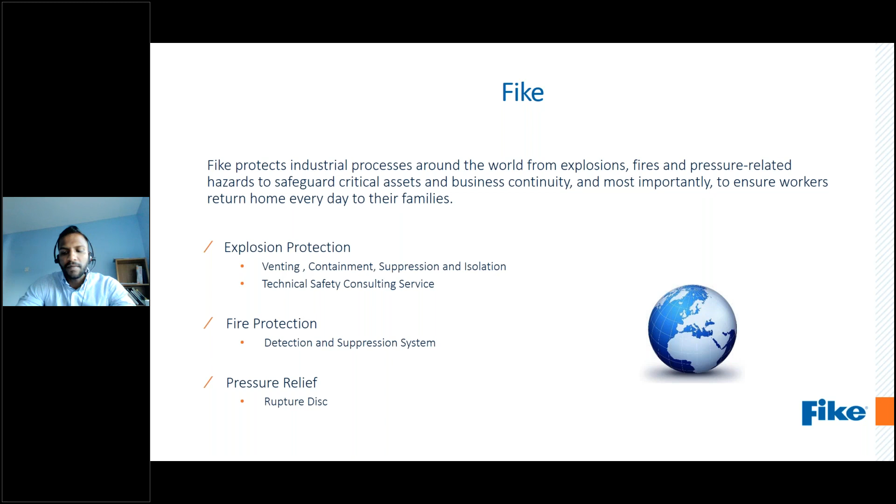The reason behind that is lack of engineering or lack of awareness. We could point out to several reasons, but it is very sad and pivotal for engineers and consultants like us to understand from each near miss and primary explosion, so that we understand the causes and work on them through preventive measures and also protective measures, so that such deviations leading to explosion could and may not occur in the future.

If you're all interested to know more on explosion and incident investigation of these accidents, please drop me a message or email post-webinar, so that we could send you a couple of incident investigations performed by Dust Safety Science.

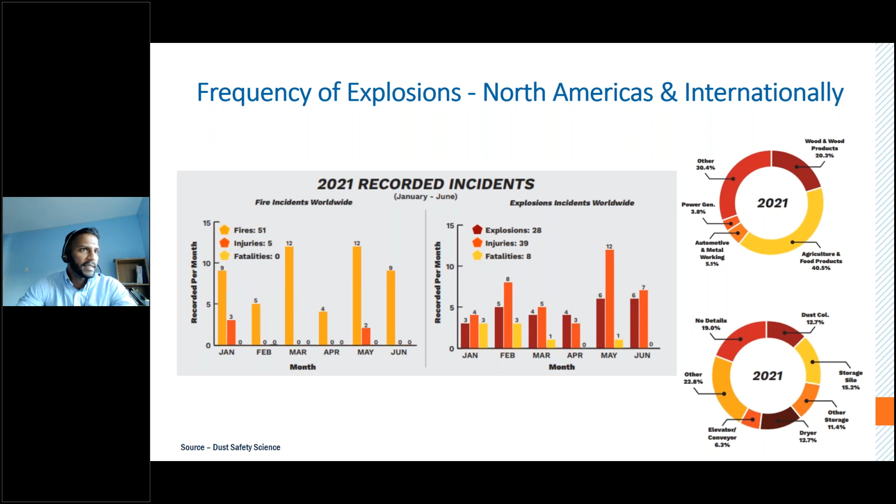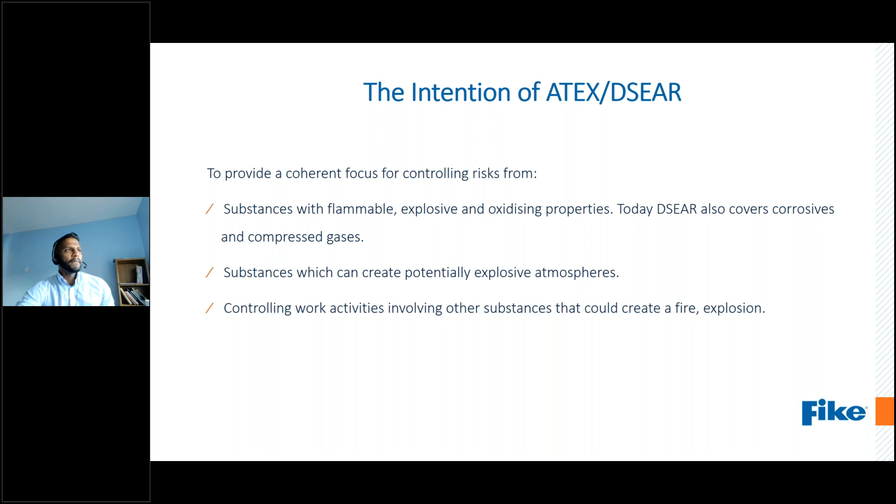If you ask me, is there a minimum requirement for material stored or used in a facility to get compliant with ATEX? I would say no, because ATEX is not pointing out a certain amount of material. The reason is, say if I'm running a plant manufacturing an explosive like TNT, 1 milligram to 5 milligram of TNT can take out an entire roof. So ATEX is not specifying and customizing its regulations focused on products or facility, but it's a horizontal regulation. So we have to understand where we stand and how we customize a solution accordingly.

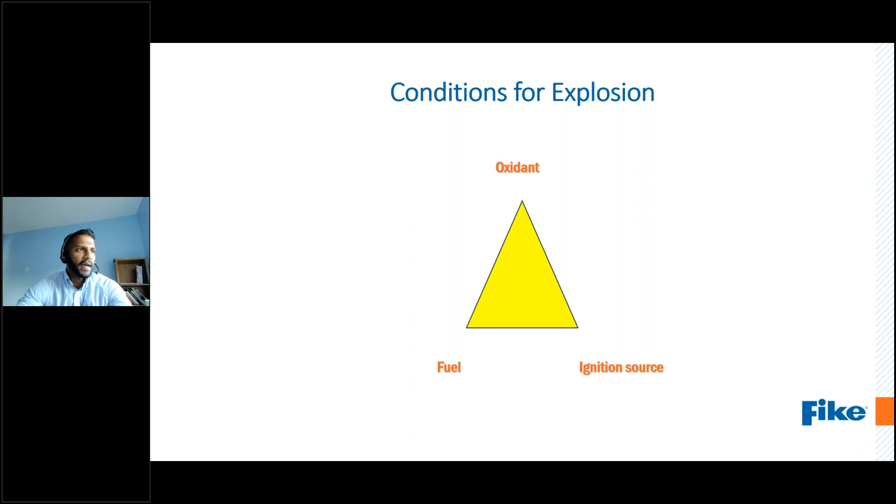Conditions for explosion - what you're looking at on the screen is actually not a condition for explosion, it is a condition for fire: oxygen, fuel, and ignition. The difference between fire and explosion is obviously mixing within a confinement.

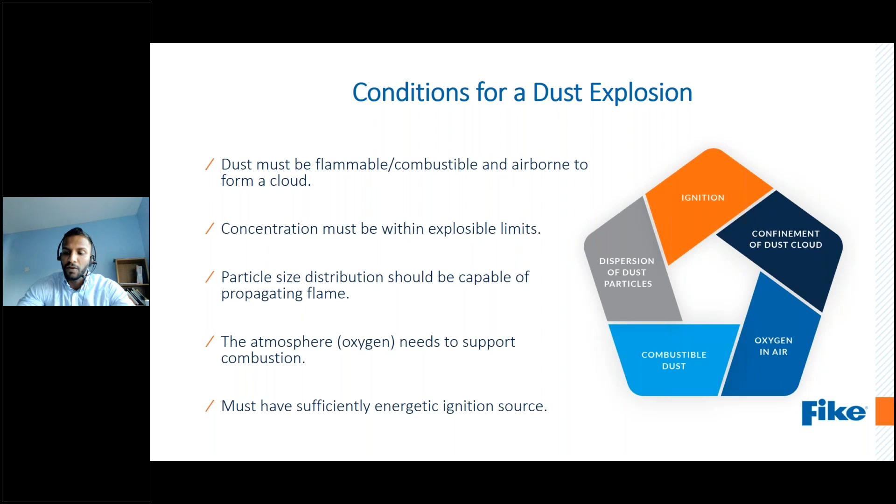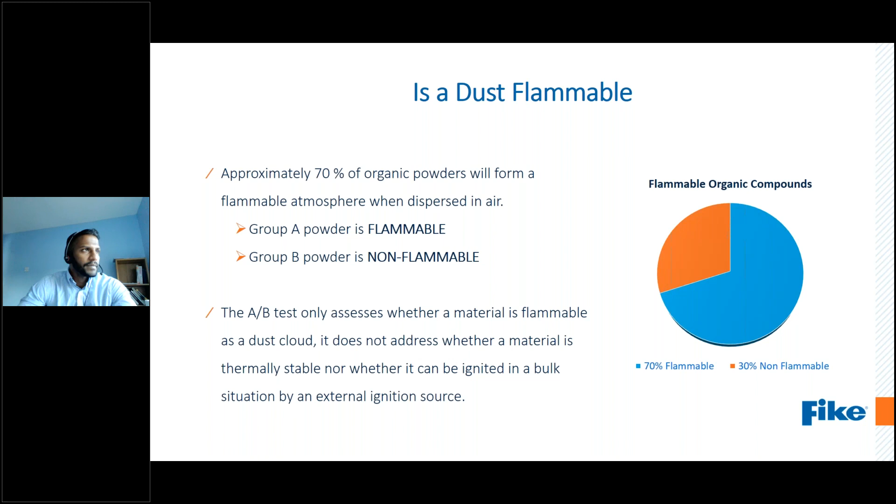Speaking of flammability data - flammability data is nothing but information we would find in a safety data sheet, same as for gases and vapors: auto ignition temperature, ignition sensitivity, LFL and UFL, as I mentioned in the previous slide. For dust, there is something called minimum ignition energy.

That is the first piece of information we would like to understand: minimum ignition temperature, layer ignition temperature, Pmax, KST, ST class. I'm sure we have a mixed audience here - some are familiar with these terminologies, some may not - so I would like to address a couple of the top four data points.

MIE is minimum ignition energy, the energy required to ignite a dust cloud. But what is the source of this energy? It could be from different sources: an electrical circuit break, static, friction, or a foreign body causing a mechanical spark.

Minimum ignition temperature is the hot surface temperature that ignites a dust cloud. Layer ignition temperature is the same hot surface igniting a layer of dust suspended on top of them.

They do have differences and an equation relating them. MIT and LIT have an equation and relation. As the layer thickness increases, the temperature required to ignite the layer goes down due to an insulation effect. Pmax and KST are very important parameters.

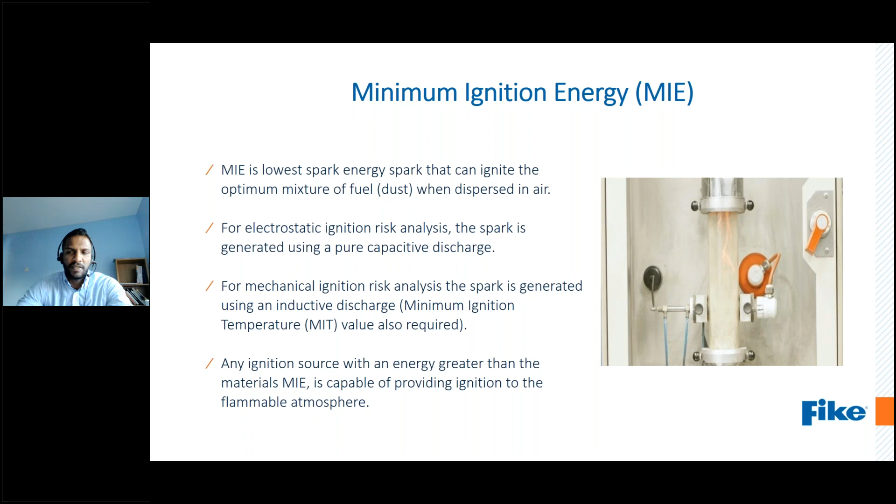Another parameter is MIT, the lower surface temperature that can ignite an optimum mixture of fuel. MIT is the auto ignition temperature for dust. It's used for establishing the maximum permitted surface temperature of both electrical and non-electrical equipment. Even mechanical equipment can become hot and give rise to high temperature.

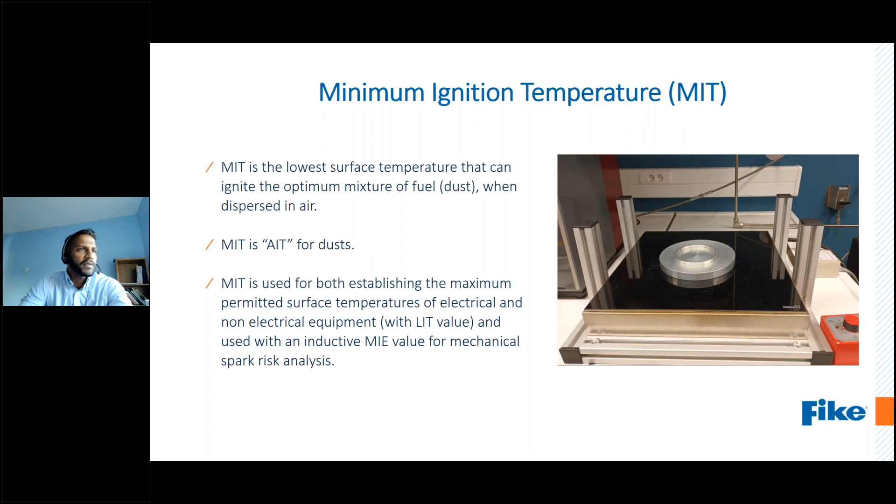So that is Pmax, and we use this information to design our safety protection equipment. KST, the dust constant, is the change of pressure over time. This is an important parameter because if Pmax is like speed, your KST is acceleration - the rate at which pressure increases over time. That's a destructive force, I would say. Explosion severity data is used to design your venting, suppression system, and containment. These parameters are used to design and define your basis of safety.

This is quite a common question, and we've been asked whenever we visit a site from our clients: how do we understand which is a dust cloud? Is there any right method to establish that this is a dust cloud or this isn't?

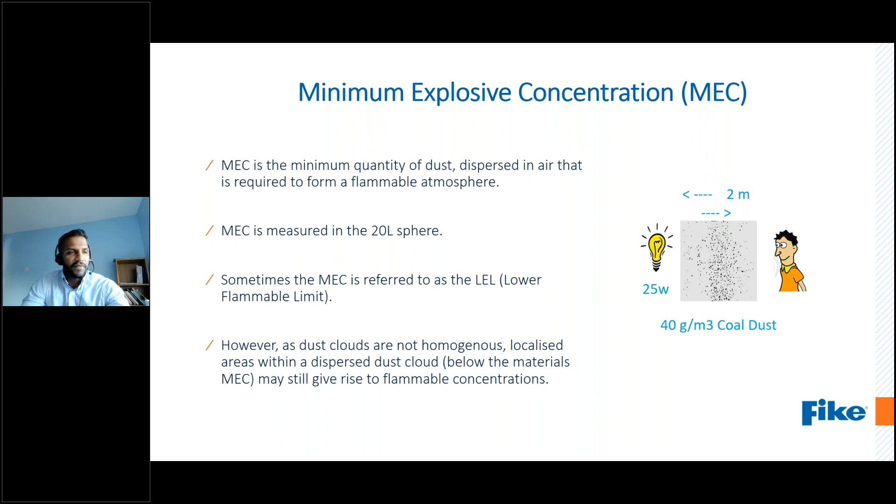That's why you get a primary explosion - maybe not a primary explosion, could be an ember or flash fire that could generate and disturb other suspended dust, then creating a primary explosion, consequently leading to a secondary explosion. So MEC is quite important if the facility is closed or a clean room, or if it is inside a hopper or a silo.

Limiting Oxygen Concentration, LOC, is the maximum concentration of oxygen in a mixture of dispersed combustible dust, air and inert gas at which an explosion will not occur. We all know oxygen plays a vital role, so there are instrumentations we set up to observe what amount of oxygen is required to form a dust cloud, and we constantly monitor that oxygen so that when the oxygen level goes up, we use inerting gases to kill the flammable atmosphere.

There are thumb rules - if you do not know the LOC value, we could take 5% volume. However, it is best that testing has to be carried out.

Before moving to basis of safety, I would like to stop here. Should you all have interest to understand more on this explosibility and ignition sensitivity and severity data - that is Pmax, KST, LIT, MIT - please drop a note to us. We would like to have your feedback so that we could put forward a new webinar on these data and how relevant they are to your process facilities, because not all data are required for your facility. Sometimes you might be misguided by Google basics research that if you have a fluid bed dryer, you might need ABC information - not necessarily.

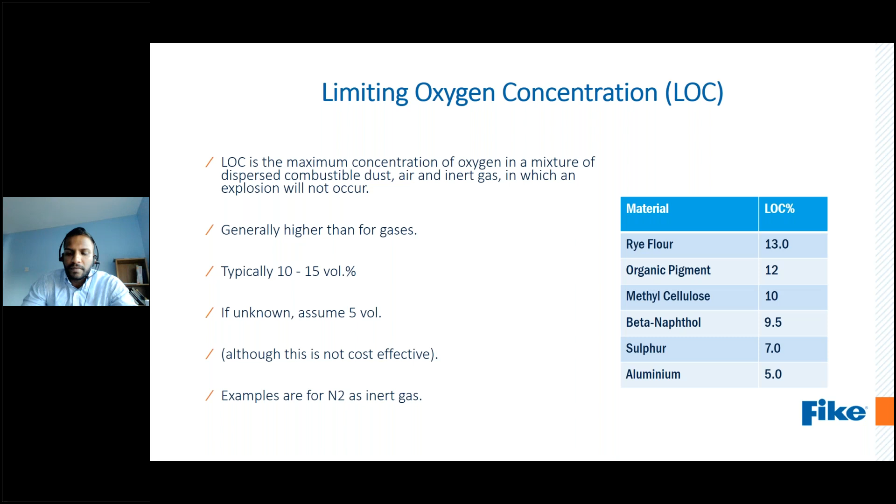The figures we discussed here, Pmax and KST - for a situation, let's say you're part of a biosolids waste generation facility. You collect all the biosolids from the facility and dump into a warehouse, which you'd expect to have 90% dry solids and 10% moisture. That's not the case - during loading and unloading in summer, because of insulation effect and heat on the warehouse roof, the material, that is the dust on the top layer, could become 100% dry.

That is Pmax - if the pressure is measured for a 90% dried solid, let's say for example it is 5 bar, if it becomes 100% dry, it could go up to 10 bar. Likewise KST, which is a destructive force - if measured for a 90% dried solid, the KST value is 20 bar meter per second, for 98 to 100% dry solids it can go up to 150 bar meter per second. That is very important to understand.

How do I test and what conditions should I test under? Likewise, second scenario - your material might be having a size, say, more than 500 microns particle size. Hence it cannot be flammable, it cannot form a dust cloud. But this may not be the same - this could be different in your dust collector dirty side.

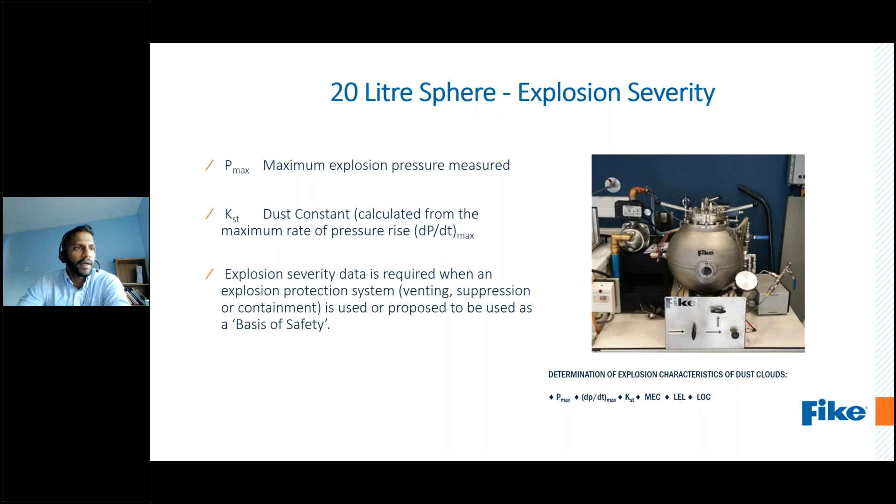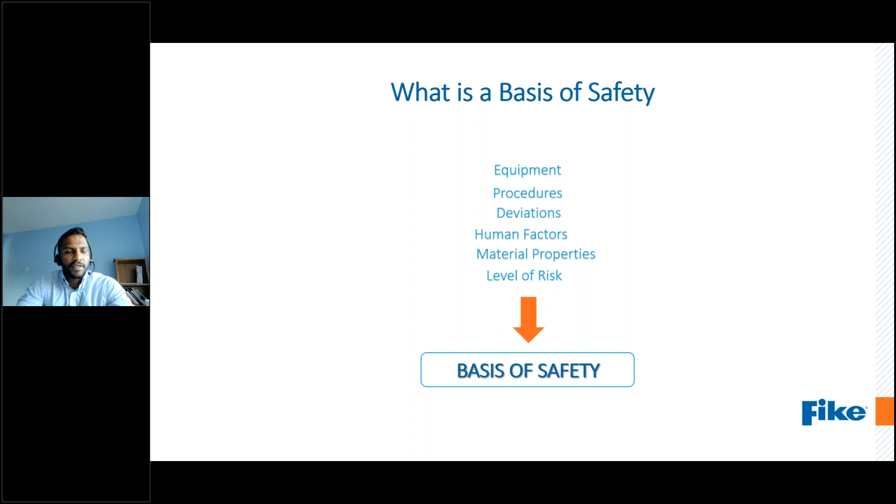Basis of safety is nothing but layer of protection, as I listed out: equipment, procedure, deviation, human factors, material properties, and level of risk. Basis of safety is nothing but combination of 1, 2, and 3.

To bring us to ensure safety is installed or implemented or achieved by a combination of three things: explosion prevention techniques, avoidance of ignition source techniques, and explosion protection techniques. Whatever we are going through now has nothing to do with ATEX regulations specifically. Of course ATEX also speaks to this, but we are understanding dust explosion first, and then we'll apply the same into ATEX regulation. Irrespective of ATEX regulations, if we have attendees from Middle East, India, other parts of Asia, or South America, I'd like to stress this: for dust explosion have basis of safety, that is 3 preventive measures, ignition control, and explosion protection.

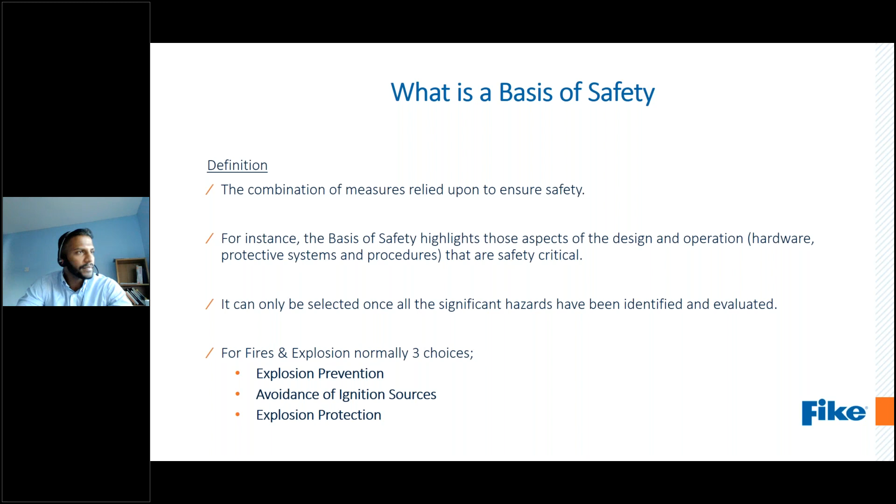There are different situations. Even if you work with a basic engineering company, you might be using acetylene for welding. Replacing acetylene with argon is also called an explosion preventive measure, because you're replacing your material. But people working in an industry like food industry cannot replace sugar. So what we do is try to keep our oxygen level controlled, or we would not blow the material around - we might do a pneumatic convey. There are several engineering measures and methods that could be applied to avoid formation of a dust cloud.

Obviously we could work for gases and vapor. We can work below flammability level, and also we can work above flammability level.

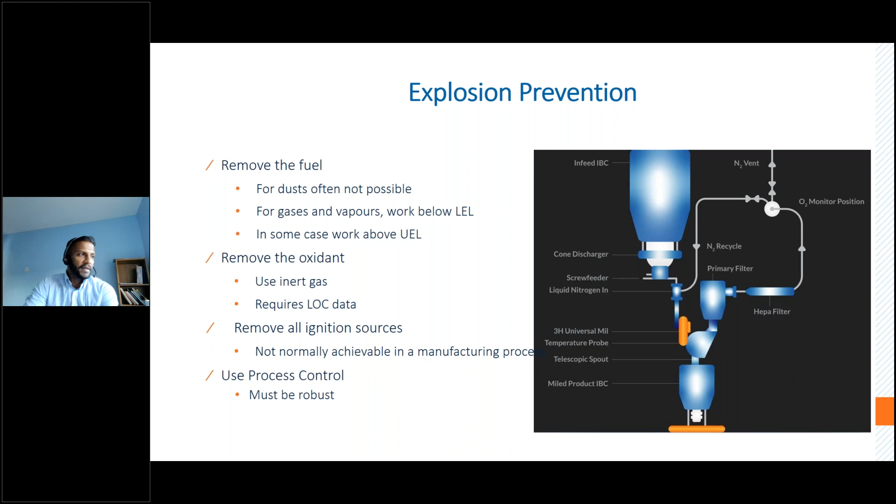The second basis of safety is nothing but avoidance of ignition sources. Avoidance of ignition sources means ensuring that equipment is in place and maintained accordingly - that is for mechanical sparks. But how do I avoid other ignition sources? Those could be from electrical, from static, and from thermal radiation.

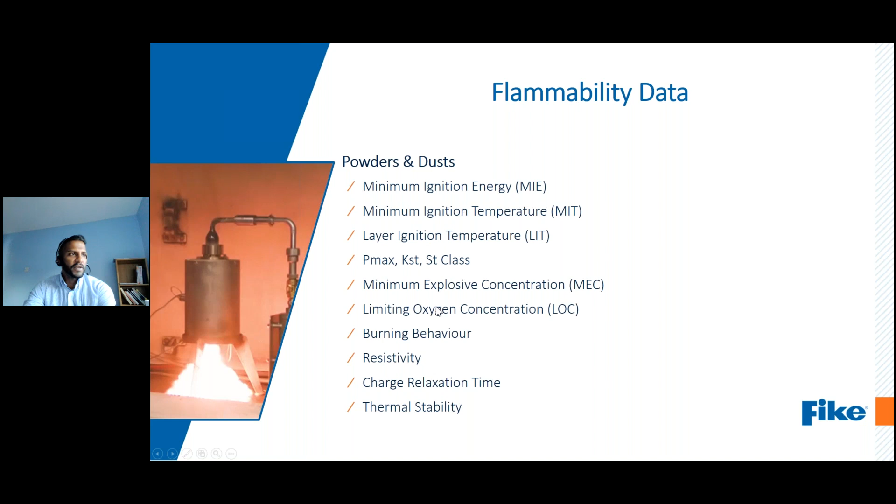That's why we need to come across data. We need to know data about the powder or material within our facility, so that we could put forward engineering measures to avoid ignition sources. For example, if I have to avoid an ignition from static - that is spark discharge - how do I know? Because each material requires a certain amount of spark discharge to get ignited. We get it tested, and then we put those measures in place.

What measures in place? We ensure earthing is in place, and there is continuity through coupling or jumpers in our pipelines. But how many industries are ensuring this by resistivity testing? That's the number one question, because whenever we go on site there could be a near miss, and a client might say, well we had a near miss and we have earthing in place.

But the first question I'll throw at them is: what is the resistivity? When was the last time you performed resistance testing? No answer, right? The resistance testing will ensure that if the material requires a certain resistance - say 15 or 12 or 10 ohms - to avoid generating an ignition source, then we have to ensure that for our material, for our product, the resistance achieved matches the measurements required.

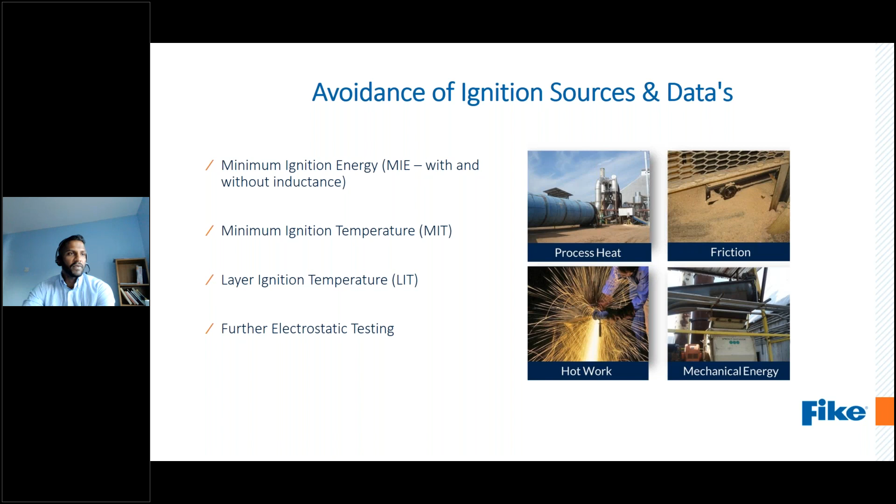The third basis of safety is containment, venting, and suppression - that is explosion protection. If your first basis of safety, preventive measures, has failed, all man-made engineering solutions can fail because they come with failure data according to reliability. Even if you install ATEX approved electrical equipment, or have a good MOC or maintenance program for mechanical sparks, they could fail because it's all man-made. So we need the third basis of safety, the final wall: containment, venting, and suppression.

Can we build a strong containment vessel? What is a containment vessel? It's a vessel built strong according to the data, that is Pmax, the maximum pressure measured. We would design a vessel or hopper or silo that could withstand an explosion pressure if the hopper is expected to be installed inside.

Venting means we design a vent according to Pmax, so that if the vent opens, we achieve Pred, the reduced pressure, to keep the dust collector or hopper or process line safe. We also need to know Pstat, the pressure at which the vent should open. If you're holding a silo or hopper dust collector of starch or sugar, Pmax of that organic material could be 8 to 10 bar depending on fineness. I would size my vent for 2 or 3 bar depending on process parameters, because sometimes process delay and process upset could cause an increase in pressure, so the vent should not open at that time.

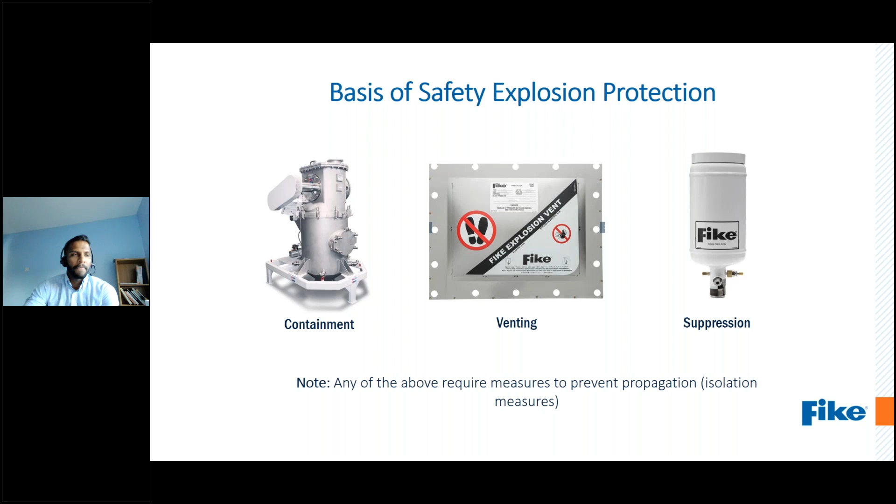Right, now we are moving on to ATEX regulations. There are two regulations. ATEX has been regulated and provided to the European Union. One is for plant and second is for equipment.

Plant safety regulations are directed toward facility owners and employers, to ensure workers' exposure to fire and explosion hazards are minimized, and generally address operations, facility, and building construction. Equipment regulation is towards facility owners and manufacturers of equipment that is intended to be installed in an explosive or flammable atmosphere.

Each independent city, country, or state has its own legal regulations created and adopted by their authority bodies. Likewise, France, UK, and Germany have observed ATEX regulations and made their own regulations as well. But all the European states and member states have to oblige ATEX regulations.

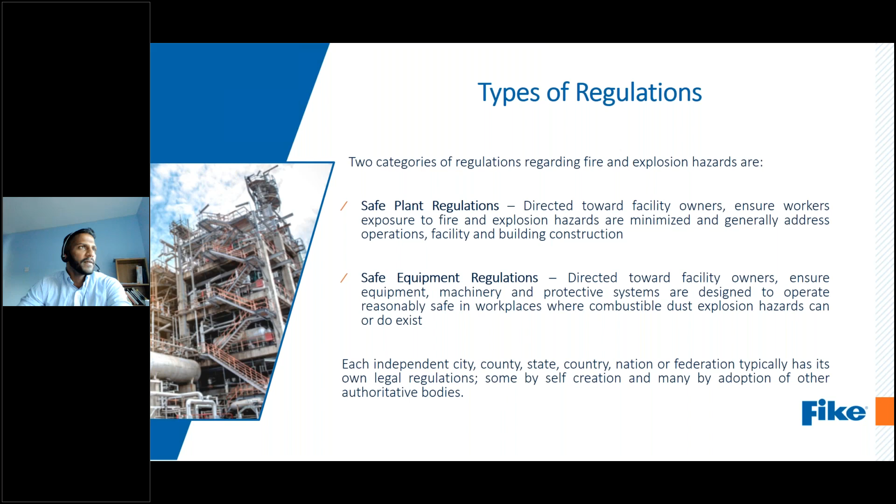So let's look into these two regulations. Work directive, like I said, is aimed to keep the workplace safe. Product directive is 2014-34 EU regulation 114.

You might come across different numbers, like instead of 153 you'd come across 137, and instead of ATEX 114 for equipment you could come across 95. These are all older regulations that have been amended and given more detail to make the standards simpler for employers and countries to observe.

The reason behind ATEX starting in 1999, building on 98, is to allow free trade between all the European Union states. That is, any electrical equipment manufactured and intended for use in flammable atmospheres, specifically chemical industry, has to follow certain manufacturing codes and principles.

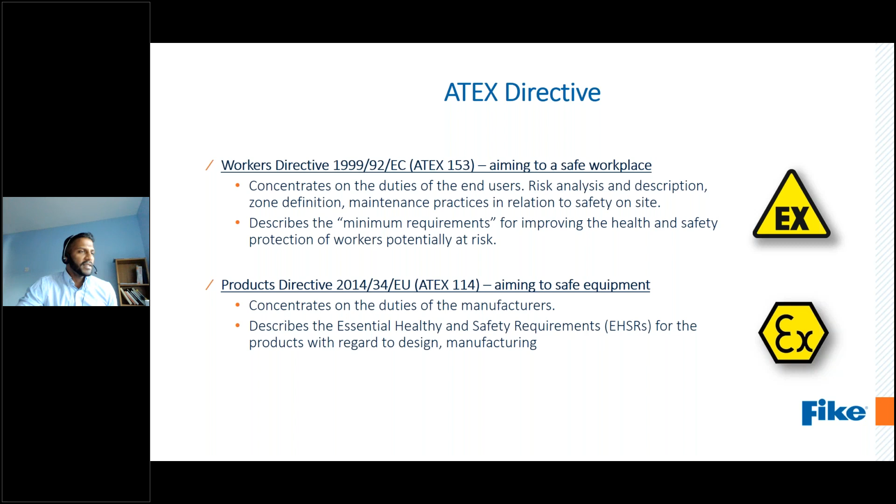Electrical installation alone cannot basically keep us safe. So there are certain principles imposed and recommended by the directive EU Commission that manufacturers, facility owners, and facility employers have to follow to keep the plant safe. What are they?

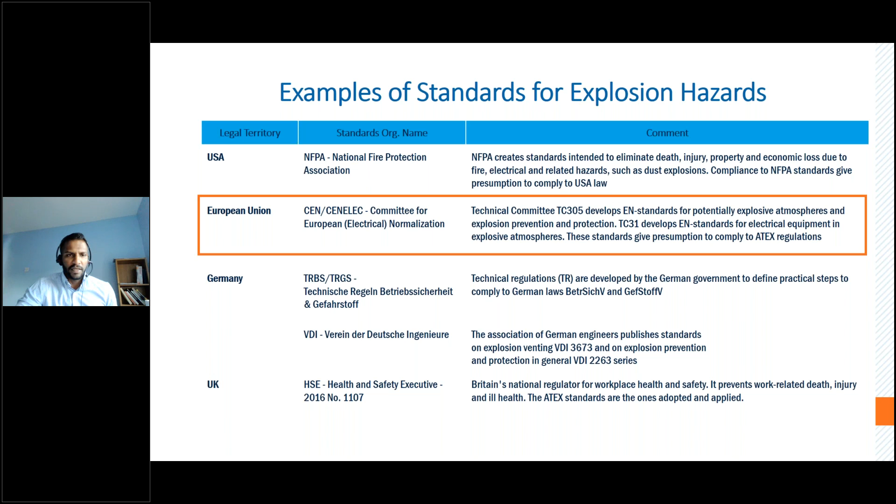So there are some examples listed here. USA uses NFPA, and the European Union uses the European Electrical Committee, which basically puts standards in place to comply with ATEX regulations. UK has HSE, Health, Safety and Executive, which also observes ATEX as one of their standards. Germany has their own standard, VDI.

It's pretty much used for suppression and explosion category VDI regulations. Here in the ATEX directive, it's carried out by the EPD method, the explosion protection document method. In the UK, DSEAR, dangerous substance explosive atmosphere regulations, is part of COSHH as well. And in the USA, DHA, dust hazard analysis, is a risk assessment method performed to understand risk and deviation of risk.

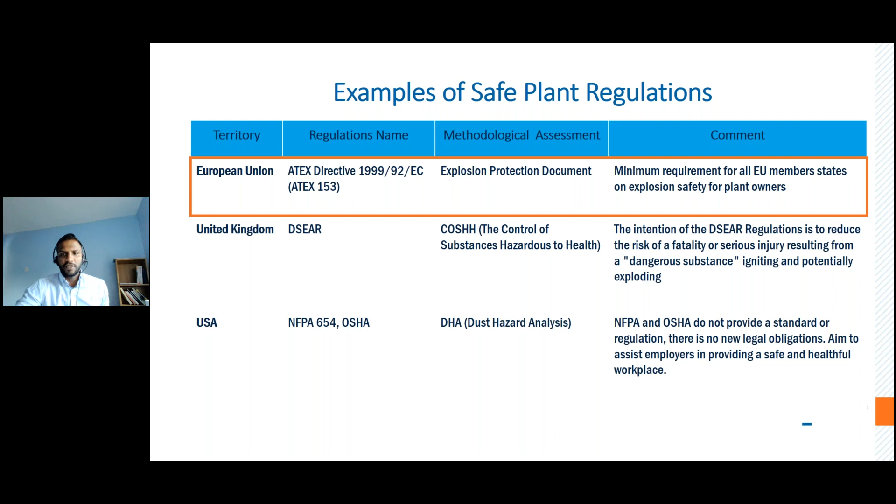In the equipment category, equipment explosion safety requirements for electrical and mechanical equipment across all member states is brought by the 2014/34 amendments. There's a snapshot of these regulations, and you should get a full snapshot of the entire webinar content after this webinar. So I would remind you to keep a couple of these regulations in mind.

EPD, explosion protection document, is nothing but a set of documents which will include your material information, your process information, P&ID, process description, process parameters, management of change, history of incidents and accidents, the material you manufacture or procure or any byproduct of your process, and the data we have seen, like MIT, LIT, those parameters, their reactivity, their nature—everything should be recorded.

And then a risk assessment should be formally carried out by an expert, in-house or external. Those risk assessments should be recorded, along with an action plan, training employees on ATEX, and equipment information—what equipment is installed in hazardous areas. We'll come across a hazardous area section in a couple of slides.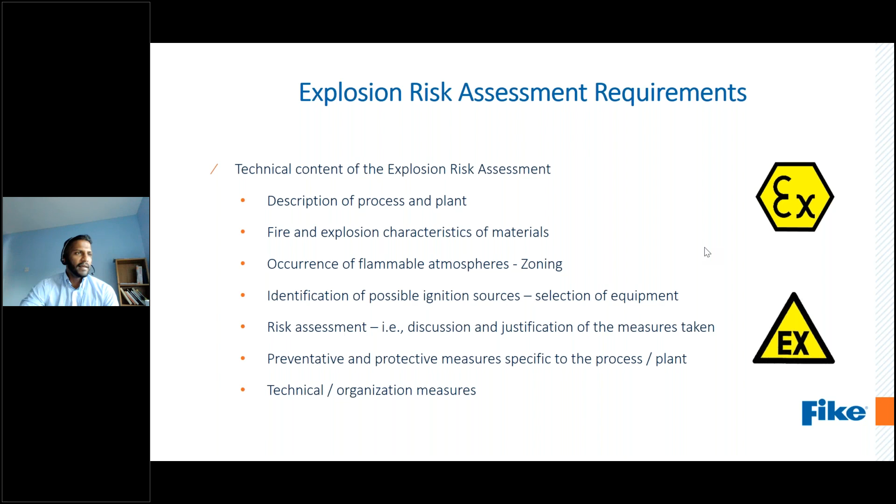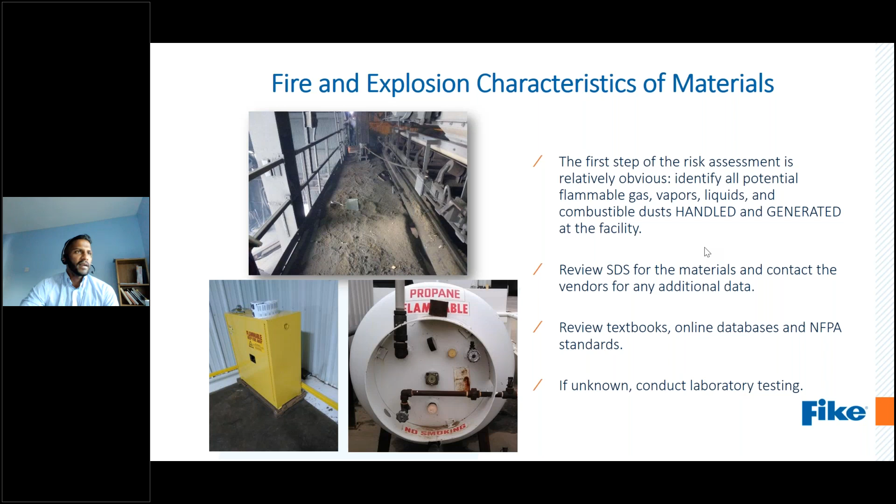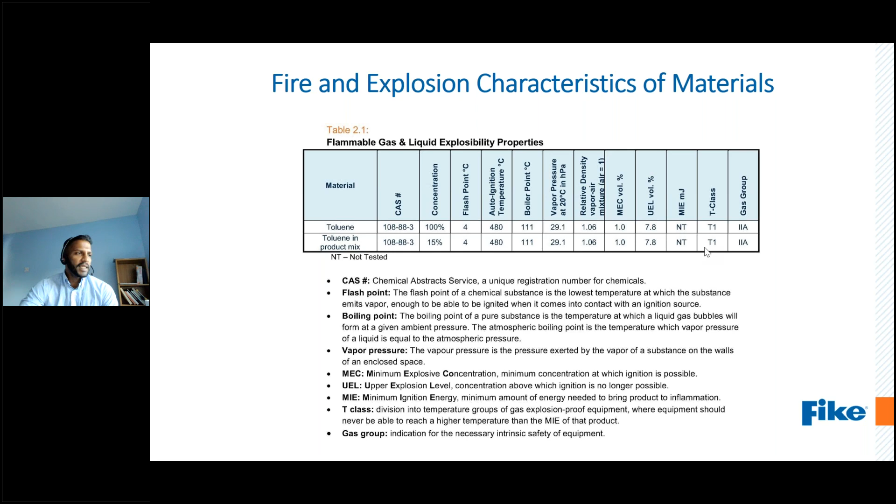Fire and explosion characteristics of material - we've already seen this, right? What are the characteristics of material? For vapors and gases, this information is found in the safety data sheet: flash point, boiling point, vapor pressure, MEC, upper explosion level, minimum ignition energy. The minimum ignition energy principle is the same for vapor, gas, and dust, and T-class and gas group. Since we're focusing on dust, I'll skip to the next slide.

Here's how a basic risk assessment template looks, this is how we capture the information: explosion pressure, KST, concentration, minimum ignition energy. I think this minimum ignition energy is very good, because it's bigger than 1000 millijoules. If I say a human could store a minimum ignition energy of 30 millijoules, meaning we could store up to 30 millijoules - what happens if we store more than that?

That's why when you touch the door, we get a shock. The reason is we cannot store more than that energy, so we tend to pass it to Earth's conductor.

A human could actually ignite a dust cloud of sugar if it's not appropriately earthed. We would say our shoes are basically anti-static, but it is silly if we walk on a painted floor, which is an insulator, obviously. So it's quite important to understand the 3-point connection of static, how we are measuring it, and whether we are actually being earthed.

Minimum ignition temperature is another data point we understood, and like I said, this is important - that is combustible content and how dry the material actually is.

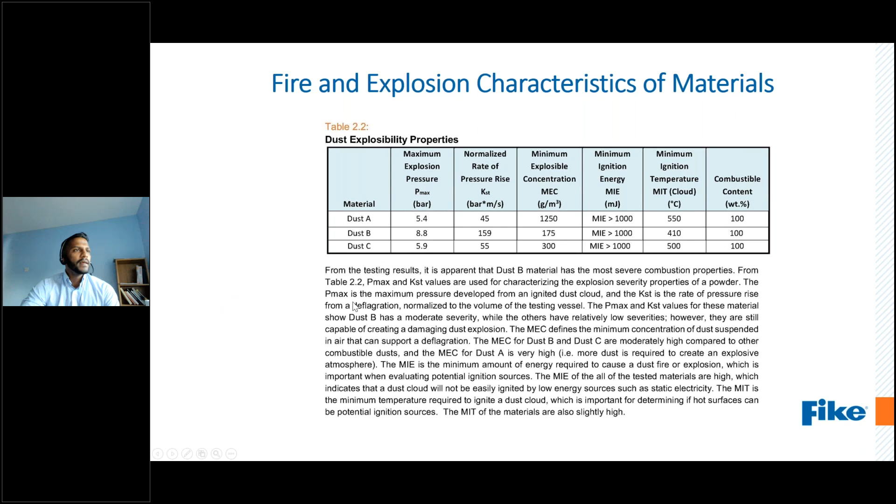Once again, explosibility testing data - this is very important for EPD. Information on material properties and explosiveness should be recorded. The recent regulations in UK and Europe, REACH regulations, indicated in 2021 that any supplier of these materials should perform testing themselves and stipulate all the information into a safety data sheet and pass it on to the manufacturer. So if you have that information with you as a material comes into your facility as part of your asset register, it's good. If not, it becomes your liability to perform testing, to record, and to make the EPD a document.

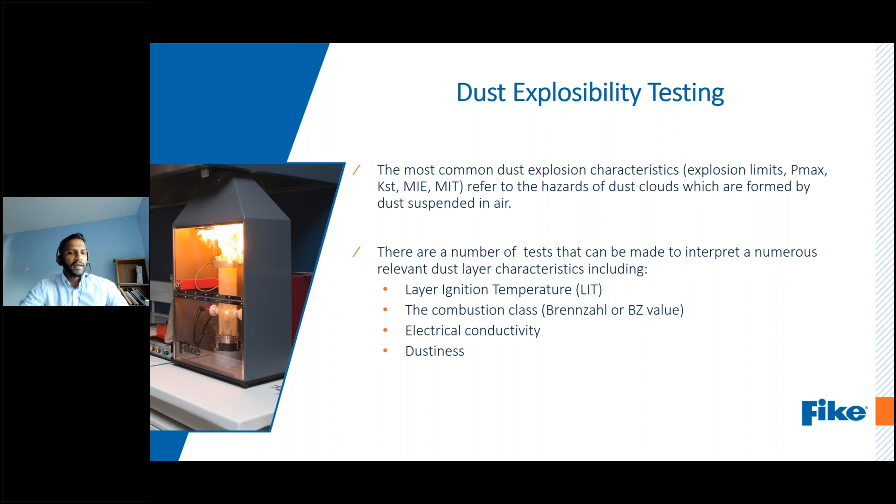Hazardous area classification - what is hazardous area? Hazardous area is nothing but an area that is expected to be hazardous in different conditions: in continuous operation, as a part of normal operation, or during a deviation.

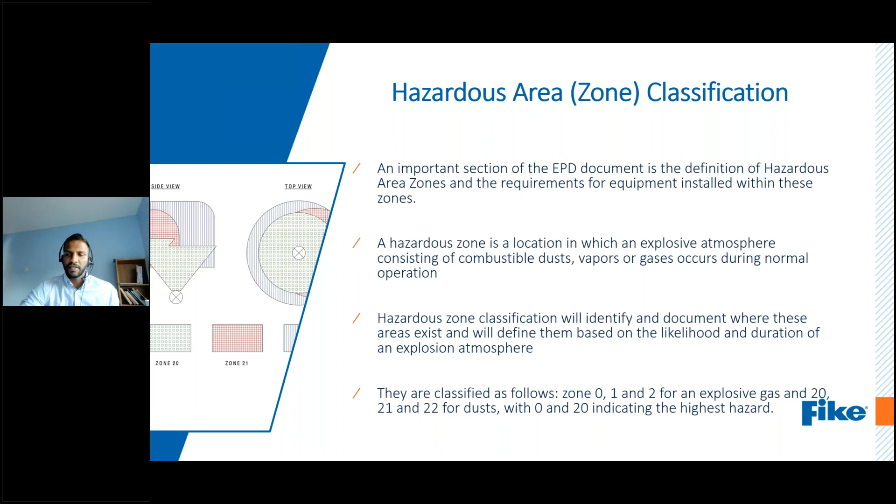EPDs enforce employers to perform hazardous area classification and record them. The reason is that in this area we will be focusing on what ignition sources are present, so that we can put measures in place to avoid them, or to protect against ignition coming into contact with an explosive atmosphere.

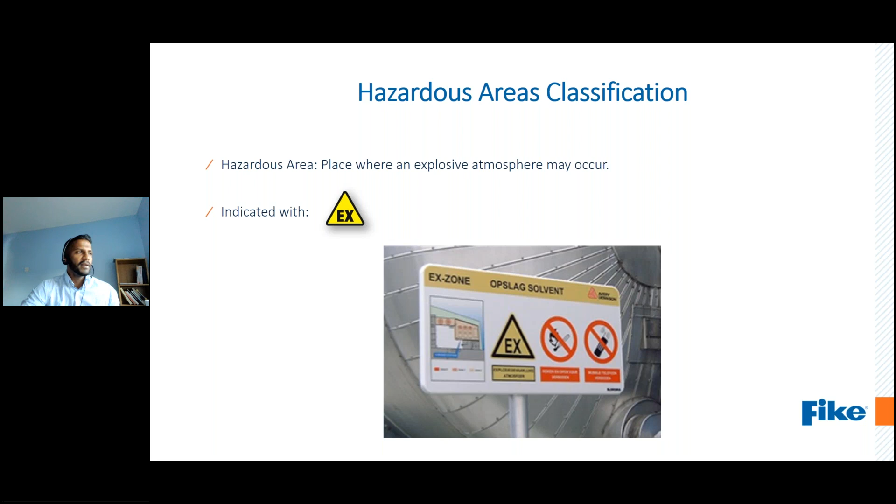Like I said, the triangle with EX indicates the area is expected to have a flammable or explosive atmosphere may occur. Hazardous area is classified into 3 categories: zone 0, 1, 2 for gas and vapor, and for dust it's the same concept - zone 20, 21, 22.

It's nothing but: when a material is present continuously in an area it's zone 20, and if it's present during normal operation it's zone 21, and if it's present during deviation or secondary release - like failure of a bag filter, failure of flanges - that could release material. Or if an operator is tipping 25 kg of sugar into a mixer, and dust is expected around the mixer and tipping station, but if it accidentally falls down, there could be a dust cloud, which is zone 22.

Another example: we all know a dust collector has 2 segments, clean and dirty side, but the honest question is, can you ensure that the clean side of your dust collector is always clean? No - I've never personally come across a clean side that isn't actually a dirty dust collector. The reason is either the material is different from what it was actually designed for - maybe the sugar or dust was expected to be 200 micron, but now the dust has actually become 100 micron, so it passes through the filter media. So your clean side basically becomes the dirty side.

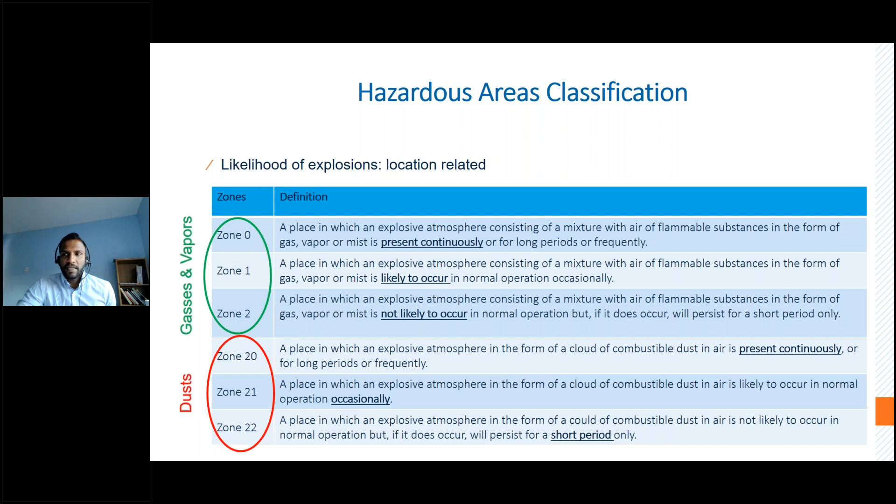So according to design, the clean side of the dust collector should be zone 22 because it's an accidental release, but due to process deviation, improper maintenance, or incorrect dust filters, if your clean side is constantly expected to have dust, it becomes zone 21. The reason behind that is there are some duration numerical calculations behind this - ATEX EN 60079 gives you these numbers.

Continuous means materials present inside a silo, hopper, or dust collector's dirty side - we could continuously see this for more than 1,000 hours inside the equipment. Likely to occur means normal operation, that is within your duct line, rotary valve, or screw conveyor, depending on whether your process is batch or continuous. Not likely to occur means the standard ATEX expects us to keep our facility clean and have a good maintenance program so that all equipment joints are according to design standard and installation guidelines - that even if there is a leak, we would address it, and there wouldn't be a leak for more than 10 hours.

I mean, it's always zone 21, but we could ensure it's zone 22 by improving our housekeeping.

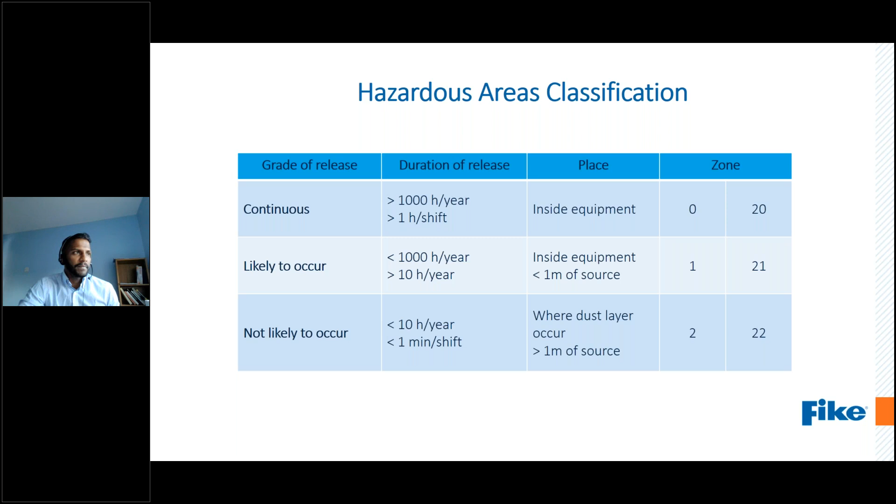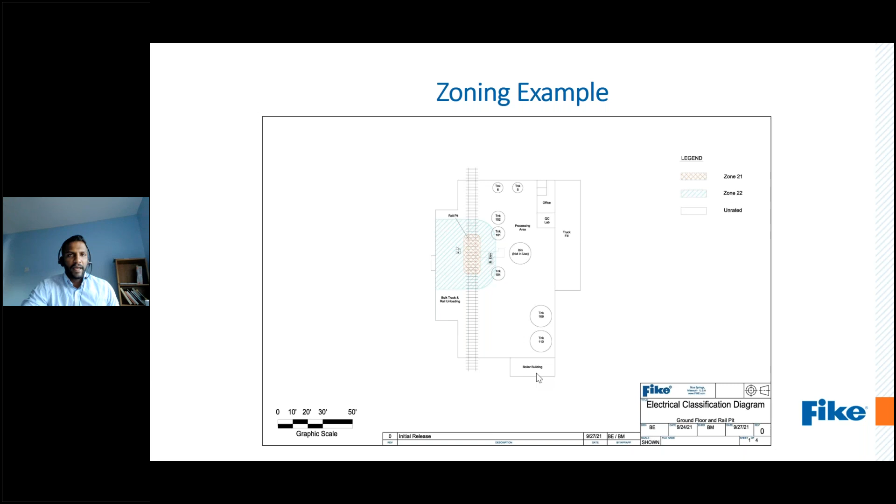What do we do with these different zones? We have multiple zones now - 20, 21, and 22. This helps you set your risk assessment level high or low and gives you a map of the facility layout. It helps you understand how big your hazard and risk are, and where you need to install ATEX equipment. In an area with levels or pressure gauges installed, they should be rated for zone 20 - meaning designed according to ATEX standard for zone 20. Equipment installed elsewhere will be rated for zone 22, and in some areas zone 21 or 22. For safety reasons, it's best to install for zone 21.

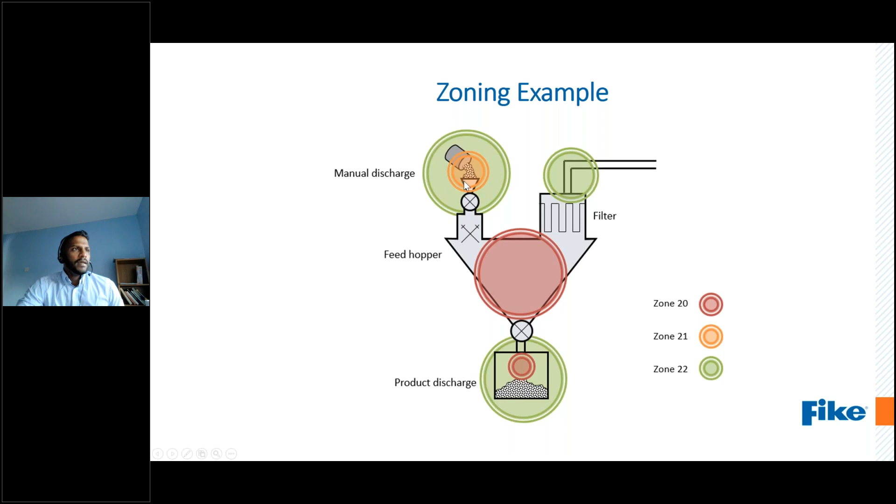We have to perform an ignition risk assessment to avoid and control ignition sources. How do we perform it? First, identify the list of ignition sources present. ATEX standard EN 1127 gives you 13 types of ignition sources. Out of those 13, we can pick the top 5 or 6 relevant to our process, list out which are relevant, and determine whether we have data or measures to control them. This way we can identify and prevent or eliminate ignition sources.

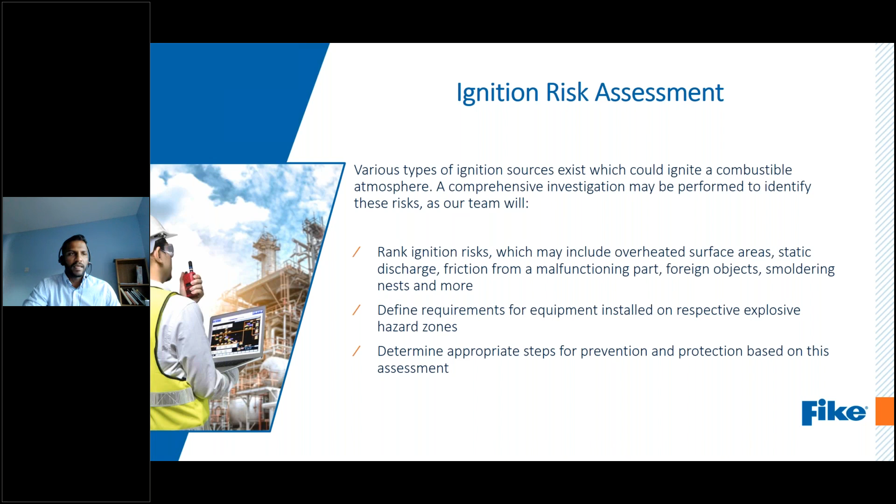Bear in mind, all ignition source assessments should be performed within the hazardous area or where ignition is expected to occur - not in the canteen, not in the admin building, not in office areas of your process flow. All ignition source risk assessments have to be performed in hazardous area zones, because recommended implementation - like installation of ATEX electrical equipment - is expensive.

We have 13 types of ignition sources - hot surfaces being one. So if I ask what data we need to mitigate or avoid hot surfaces, that means MIT and LIT, and also electrical and static considerations, etc.

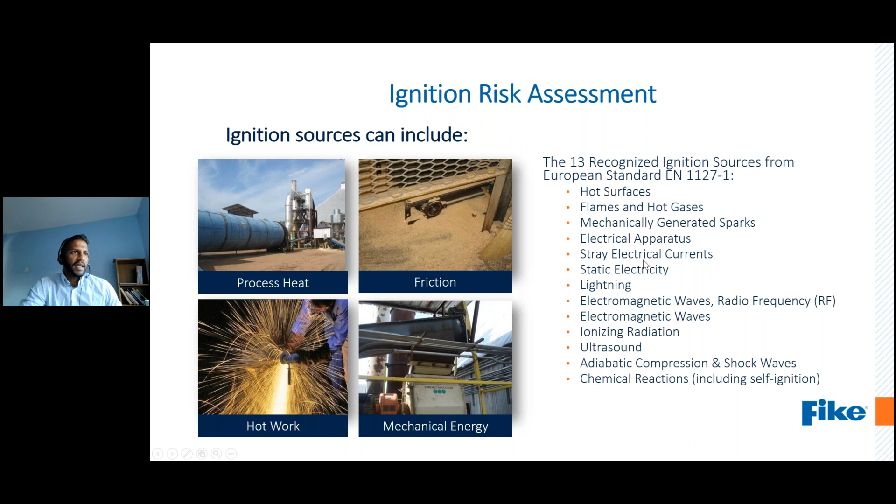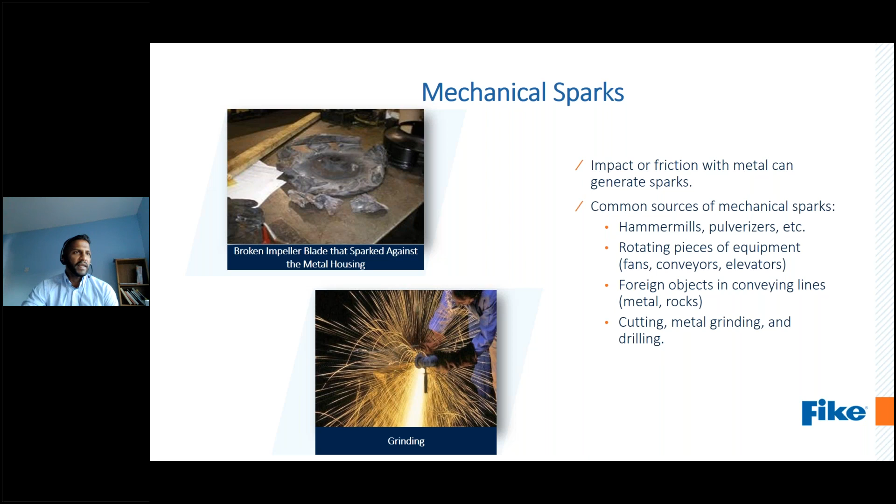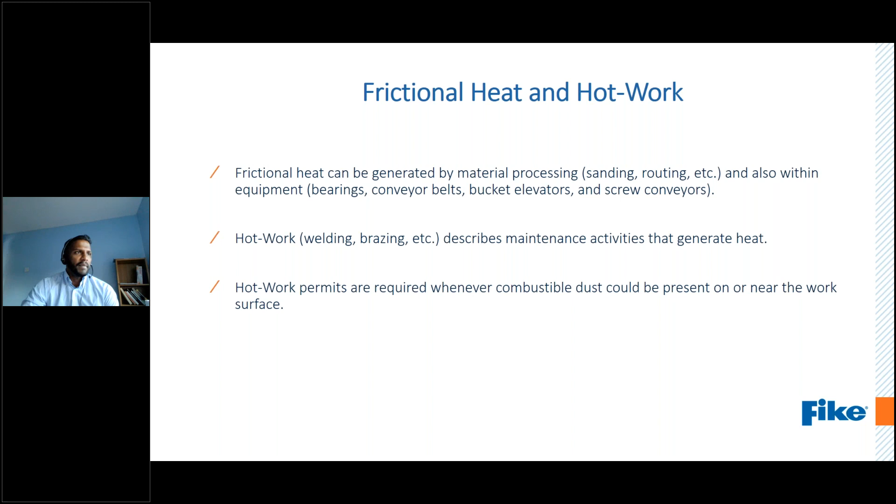Mechanical sparks are controlled through management of change programs and highly effective preventive maintenance. We all know frictional heat and hot work - frictional heat can be generated by materials. Again, mechanical maintenance is the only real solution to control mechanical sparks.

Electrical equipment ignition sources include stray electrics, electric arcs, and overheating. Electrical equipment requires two data points: MIT and MIE - that is, temperature and ignition source from spark. These two parameters must be considered before selecting or choosing electrical equipment to be installed in a hazardous area.

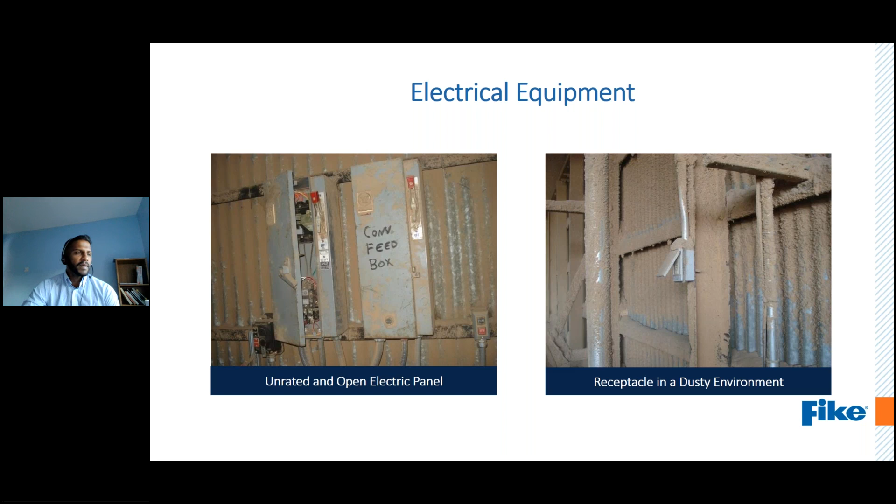Unrated electrical equipment in a dusty environment is a concern - I could see these electrical equipments are not rated according to ATEX, and housekeeping programs according to EN standard are not in place. Open flames and hot surfaces, like hanging fixtures and boiler areas, are also types of ignition sources.

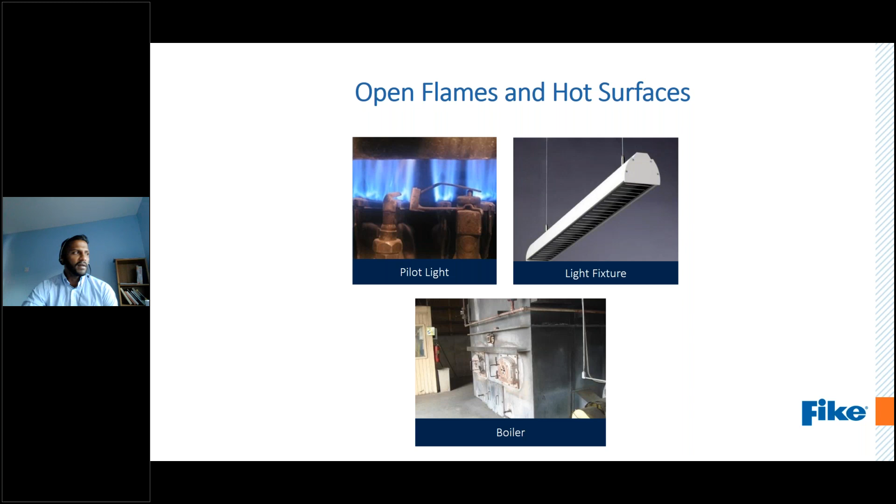Static electricity is very important to understand - spark discharge, bulk discharge, cone discharge. There are several types of static, even corona discharges and propagating brush discharges. If you're interested to know more about static alone, please drop us a message or email, and we would consider putting forward a webinar on ignition risk assessment alone.

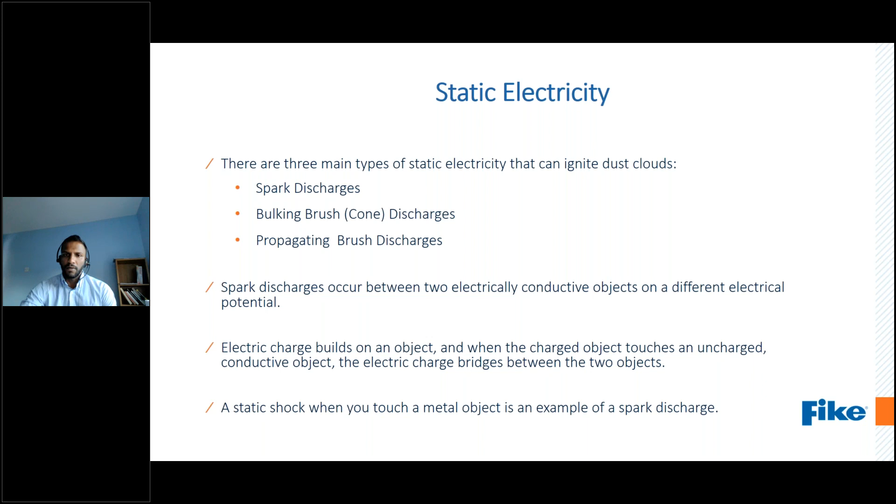An operator can hold up to 30 millijoules of static electricity. So if we walk into a dust cloud of pharma, chemical, metal dust, or even sugar or starch, we could potentially ignite it.

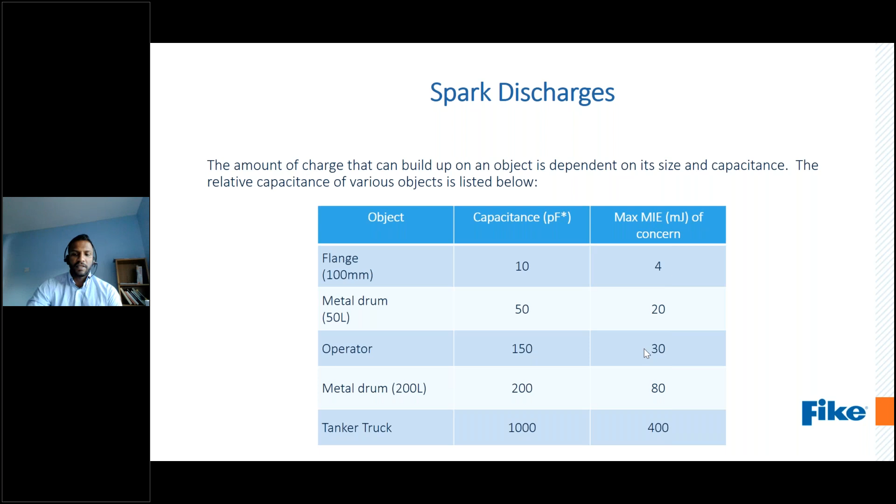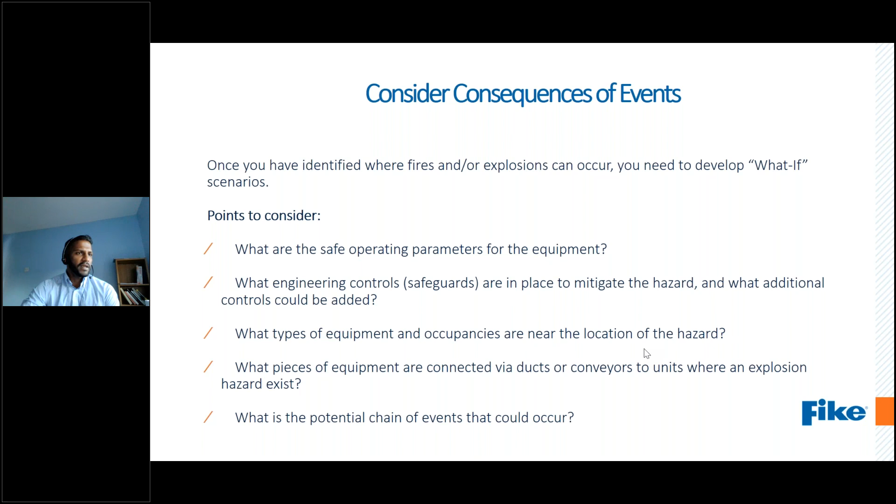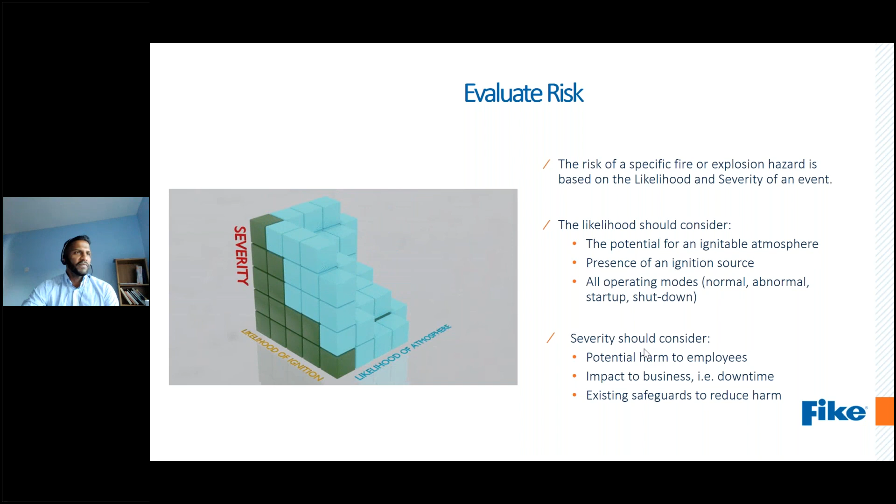Consequence has to be considered - what safe operating measures must be taken, and what equipment and occupants in nearby locations we must factor in while performing a risk assessment. We evaluate the risk by likelihood of ignition and severity level through risk assessment and ranking. This is basically a Fike risk assessment, with 5 types grouped into acceptable, tolerable, and undesirable categories. Based on this, our recommendation priority is listed out, and we advise our client which one to look at first.

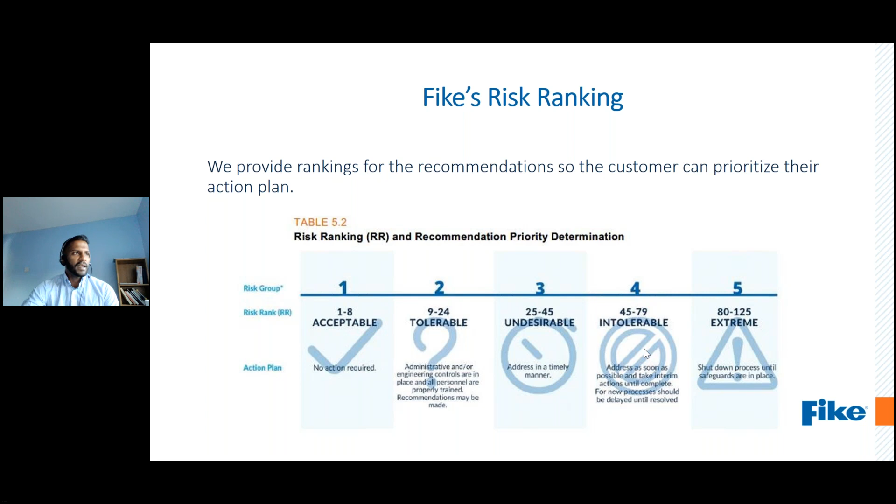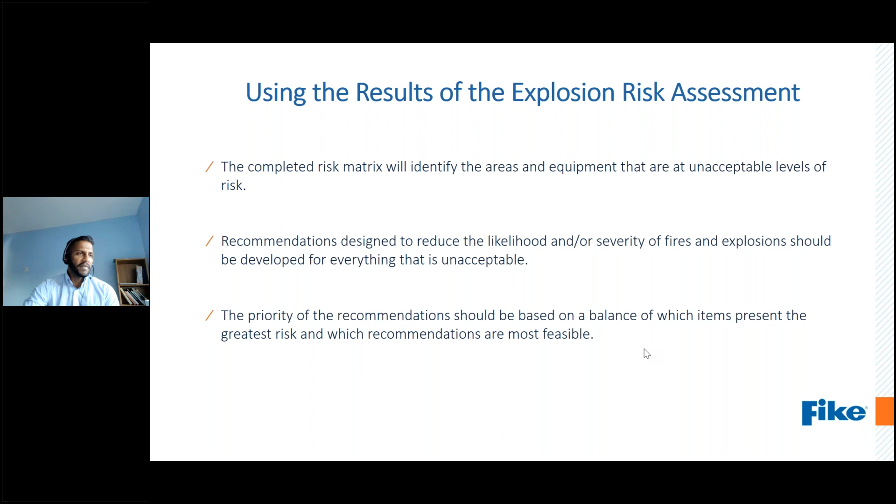What to do using the explosion risk assessment results? Of course, the aim is to control explosions, or to avoid them from occurring, to minimize their risk, and prioritize preventive measures first, rather than installation of equipment that just protects.

In order to mitigate explosion hazards, housekeeping is very important, and that is an administrative control, engineering control, preventive measure. We need to understand preventive measures.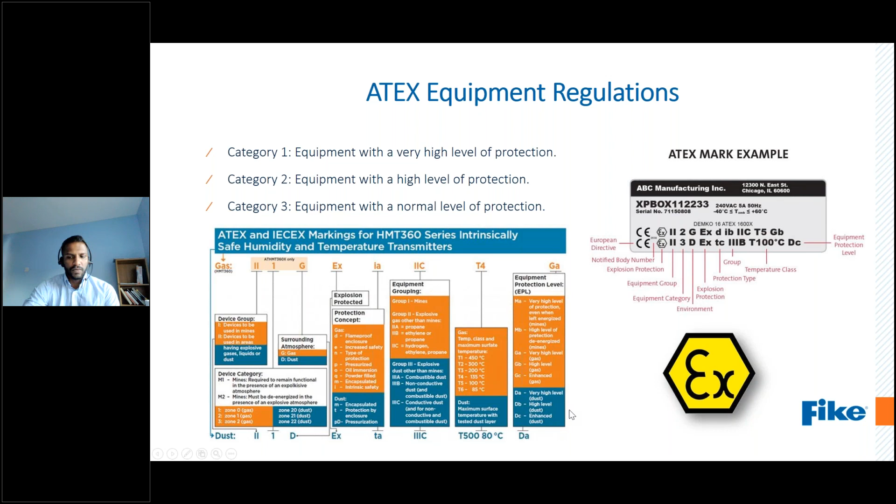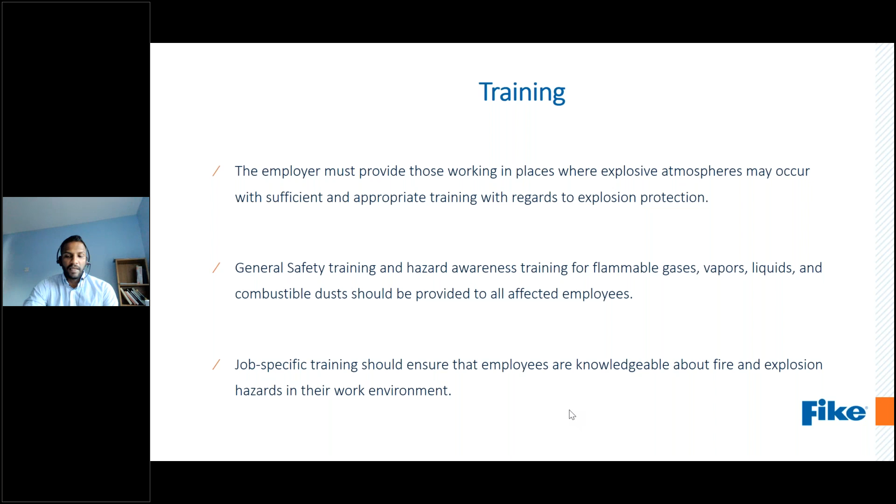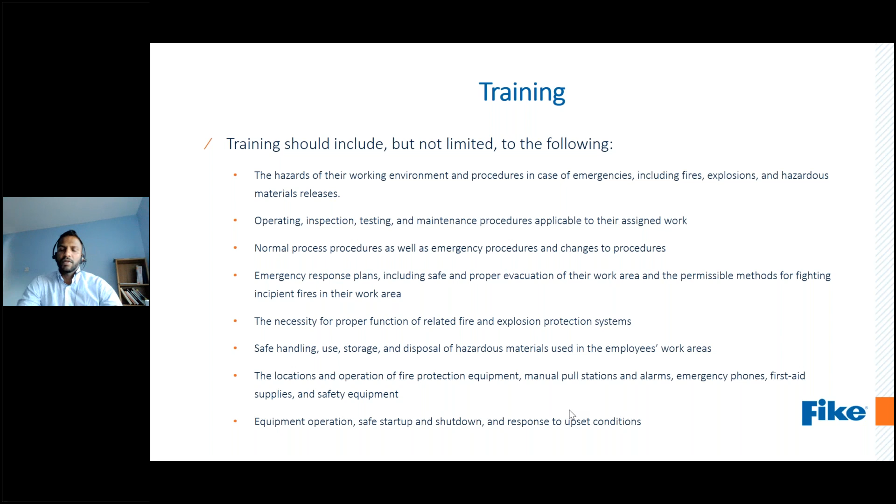Training is very important for employers to ensure it has been implemented, with awareness on ATEX imparted horizontally from engineer level to ground level. The ATEX concept and EPD document should be shared among all employees. The training should include everything we've covered so far, captured in detail and shared within employees.

All information on EPD should be written and recorded, and that has to be part of your work permit, because hazardous area classification should be included in your work permit, which will let an external contractor identify whether to make hot work or not in zones.

EPD review, as I said, should be kept up to date. If there is a management of change, it has to be reviewed, recorded, amended, and then made into a controlled document.